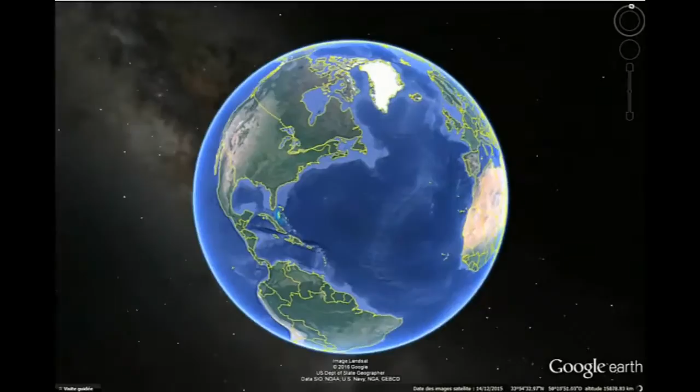Before introducing our retrofit, let me show you where it is based. We are in Paris, with the famous Eiffel Tower. Now we'll go to the 13th district of Paris. The Paris office is near the Tolbiac Bridge, not a big bridge, but well known by people who live in Paris. This is the Paris office here, and on this side you've got the François Mitterrand Library, also well known.

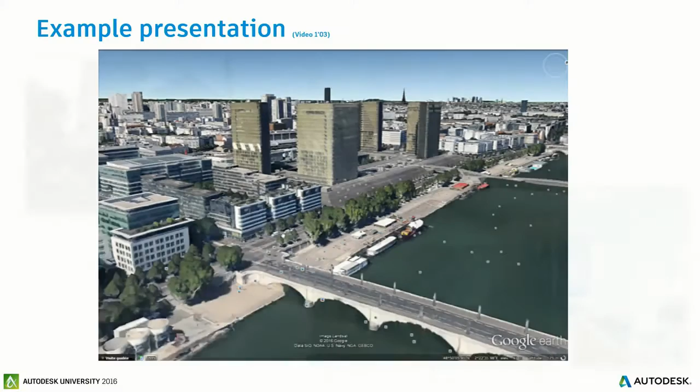Here you've got some pictures outside and inside, and this part was the area where we did the retrofit.

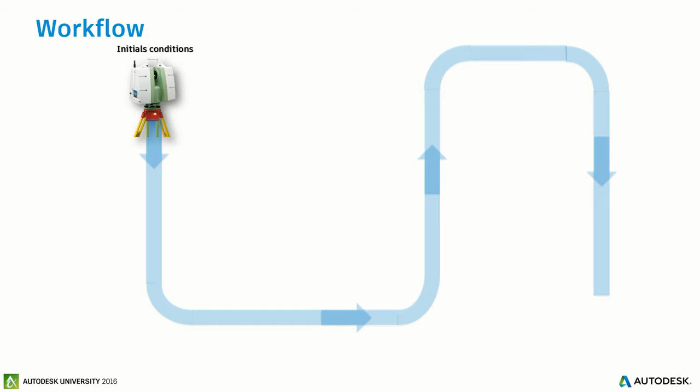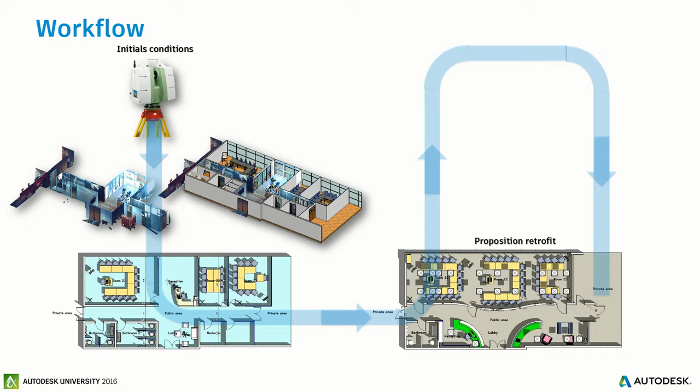Let me explain the workflow we used. First, the story starts with 3D scanning. As you see, we start with a Leica scanner, but it could be done with others, no problem. Second step, after capturing the point cloud, we build the mockup using a software. After building this mockup, we need to create some architectural proposition, using another software I'll show you after, and we obtain this final proposition.

After this, we need to build this on site. We use a robotic total station from Leica, I don't remember the name... it's the P40, or P50. And we build the retrofit.

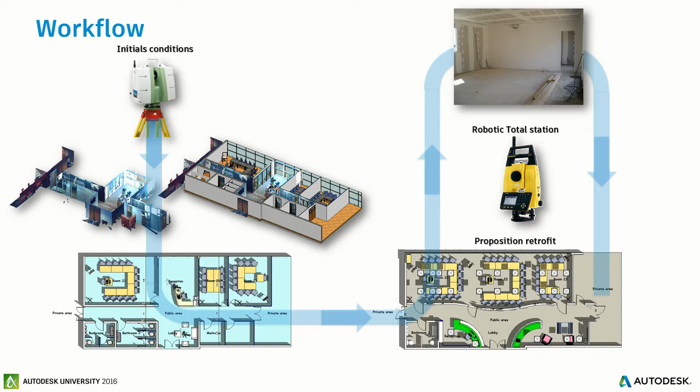We add another thing to our demonstration: how the accuracy we have on the site is taken into the final mockup. This is for quality reasons, to check if what was built corresponds to our mockup, because sometimes there's a gap between them.

And of course we use some software. First step, ReCap 360, which we'll talk about after. For the architectural proposition, we use Revit and Formit 360. Does anybody know Formit 360? Yeah, okay. And for the construction side, we use BIM 360 software services, like BIM 360 Layout and BIM 360 Glue.

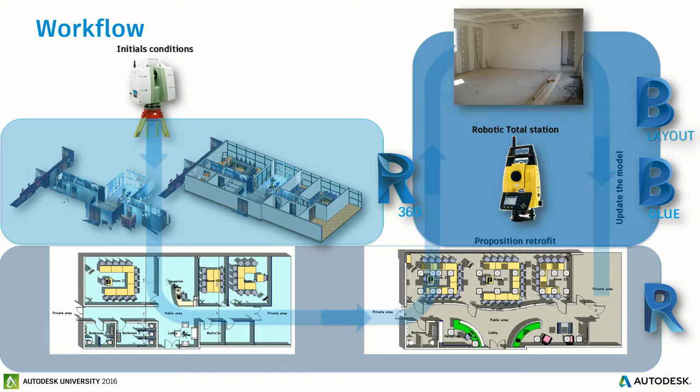First step, transform the point cloud taken on site into one single point cloud. Starting with the Leica 3D scan, we use ReCap 360 to merge all the scans into one single scan.

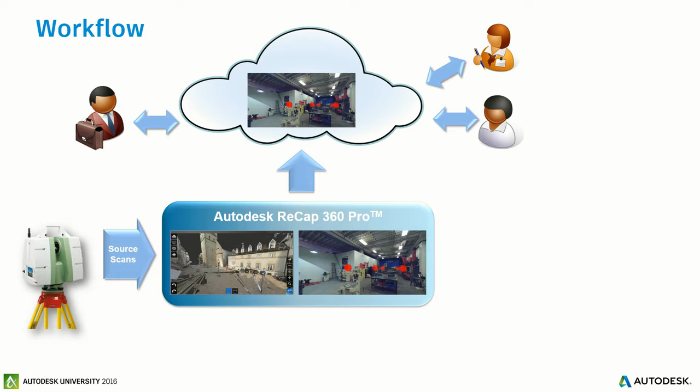The aim of ReCap 360 is to generate an RCP or RCS file to be opened in Autodesk CAD software. For instance, Revit, AutoCAD, 3ds Max, Inventor, Navisworks, and others.

Maybe some people have never used a 3D scan before. Let me show you this video. It is where the retrofit was made.

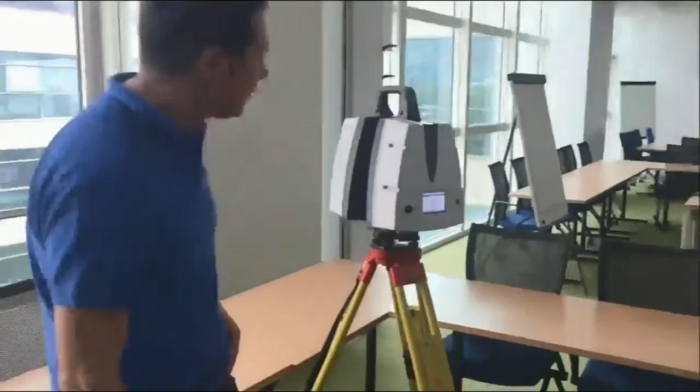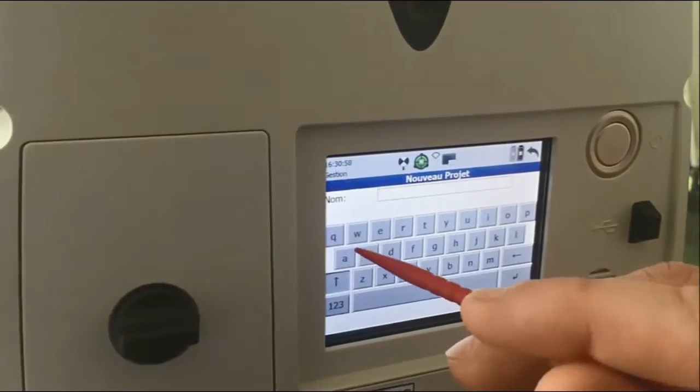You've got this scanner, a P40 Leica scanner. First you set up the scan, entering the project name and other settings such as resolution, whether you want color or not, and whether you want only one part of the area or the full 360 degree area. After setting these parameters, you click the scan button.

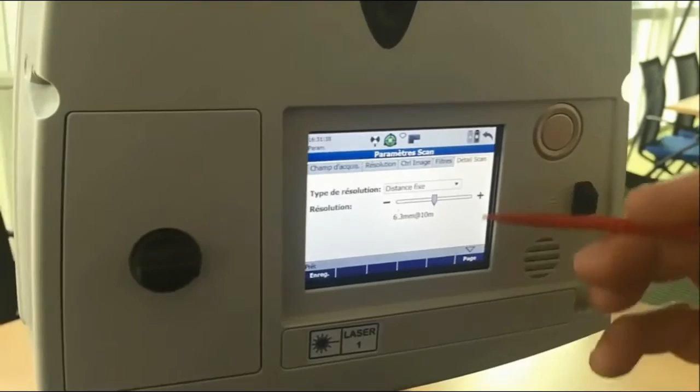Are you aware of Leica's announcement about the newest scanner, the BLK360? It will be amazing.

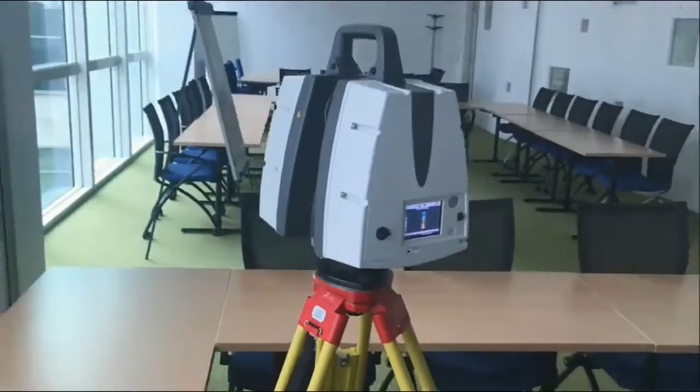When you start the scan, there are two steps. First, you use a laser to capture all points in space, giving you X, Y, Z coordinates. Second, it takes pictures, in color or black and white, to colorize your point cloud.

At the end, about 12 minutes after starting, you've got a nice picture with color indicating the intensity of each point. The better intensity you have, the better accuracy you will have. And it will look like this picture.

Now is the stage to bring this point cloud into ReCap 360. There are three steps. First, you collect all data into ReCap 360. This depends on the number of scans and whether you want color, and it takes some time, maybe an hour or more.

After collecting the scans, the second step is to merge all scans into one single scan. There is automatic recognition, meaning it takes the first scan with the second scan, detects the relevant common points, merges them, and creates groups.

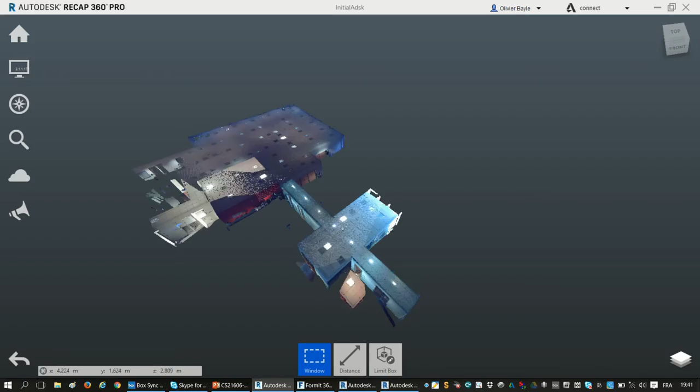Let's have a look. Oh, my computer is too quick. Sorry.

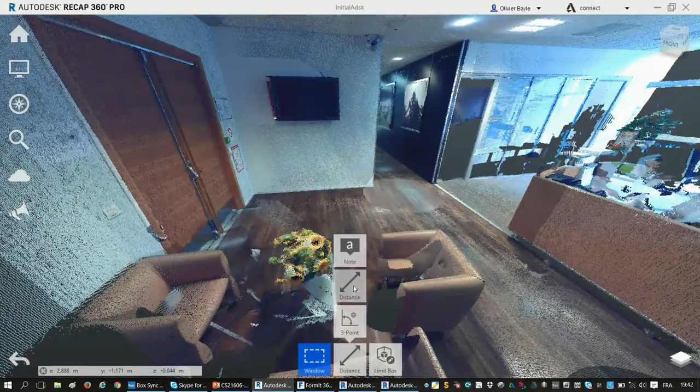As you see, you've got the same picture as I showed you before, but it is a point cloud. The point cloud allows me to take some distances. For instance, I'll take a measurement here, and using the tab mode, I can detect the vertical direction and get the right dimension in that direction.

I can also take some angles. You see, it's very accurate because this data is taken directly from the point cloud.

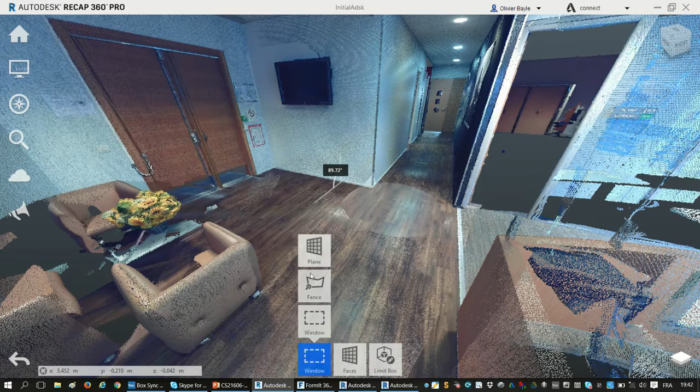You can create regions to switch some parts on or remove parts that you don't want. For instance, I'll create a region by plane, selecting some points, and it creates a region for me. I can give it a name, let's say Toto, and record it. You've got your Toto. You know Toto? It's a French name.

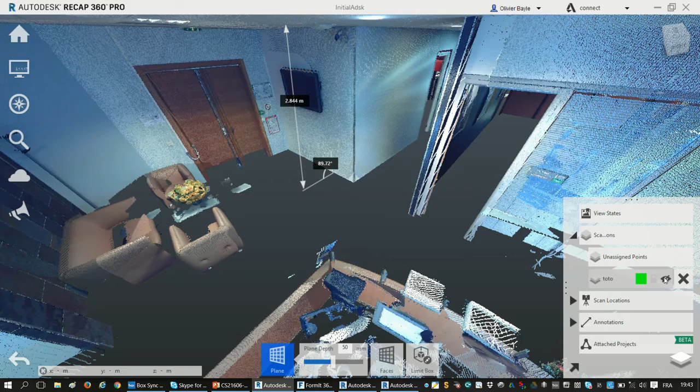You can fix or lock your point cloud, meaning you can't select or modify it, but you can also switch the point cloud off to avoid seeing it or making mistakes, to avoid trouble. By the way, when your region is fixed, you can create selections like this.

As you see, I select only this point cloud. That means if I create a new region, let's give a name, you can, if you want, remove it. I've got a hole behind the chair because there is no point under the chair. But you can clean your point cloud this way.

Of course, I can go deeper in ReCap 360 Pro because there are a lot of options inside, a lot of features. But I can give you some information about cleaning because we've got automatic cleaning. It is an automatic process that detects which points are noises, and it creates a special group that you can remove or hide.

There is another terrific feature I hope you will use after our presentation: scan to mesh. It is to create, starting from your point cloud, a mesh. It is awesome.

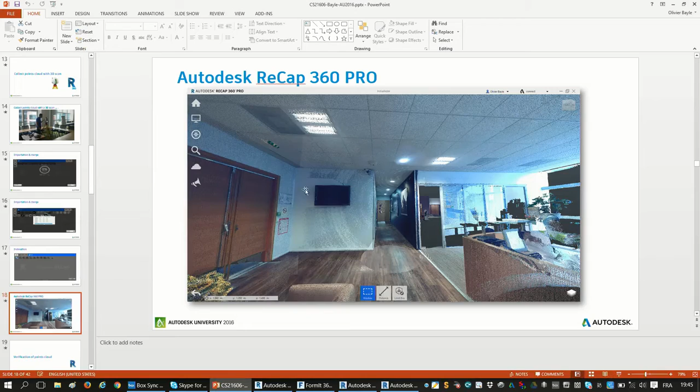Let's return to the PowerPoint presentation. Second step, it is to bring the point cloud into the software. The software to build the mockup, we use Revit. But we can also use Inventor or 3ds Max, though for this kind of stuff it's better to use Revit. I will show you the way to bring the point cloud into Revit, and show you the best way to create a wall or whatever.

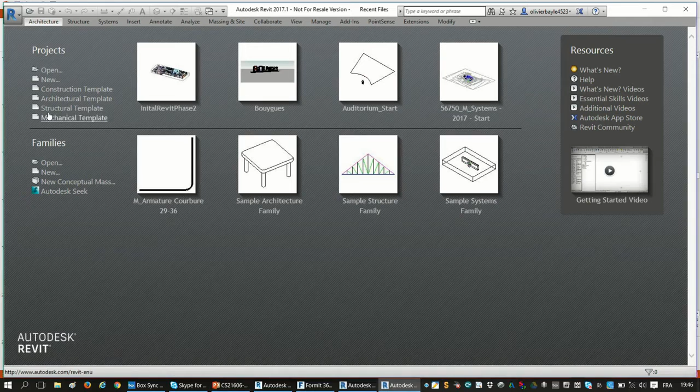We will see. I will start with the structural template. It's my template, but you can create your own. I am in 2D plan, but I can create a 3D view. We will see that further.

I will insert the point cloud. You've got a dedicated button in this area, and I will select the famous RCP file. Okay, it is inserted, and I will show you in 3D view my point cloud.

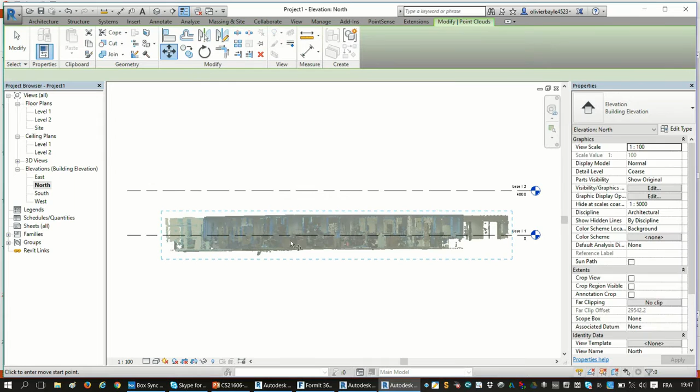Second step into Revit, it is to put the point cloud on the right position. I mean, I will take an elevation or cut, select the point cloud, take the tool displacement, take one point, and put this point on the right level. Not so complicated.

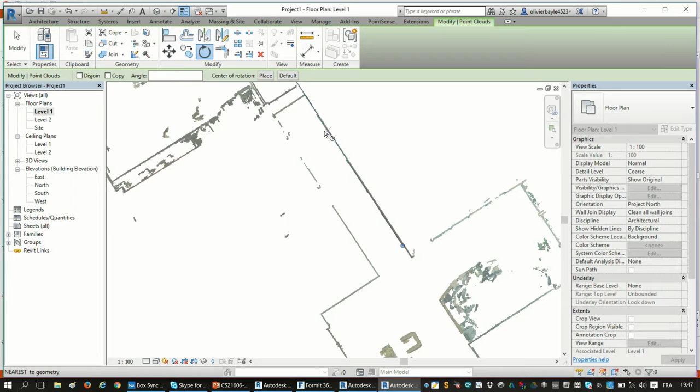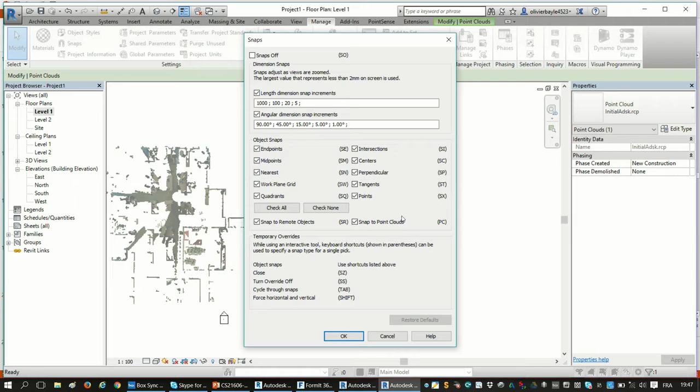I will go on level 1 and make this modification. I will turn the point cloud. As you see, there are some snaps about point cloud. For guys who never saw where the snapping options were, you can find them in the Manage tab, Snapping options, where you've got a point cloud option. Be careful, switch on this option because it's not so easy to do what I've done without it.

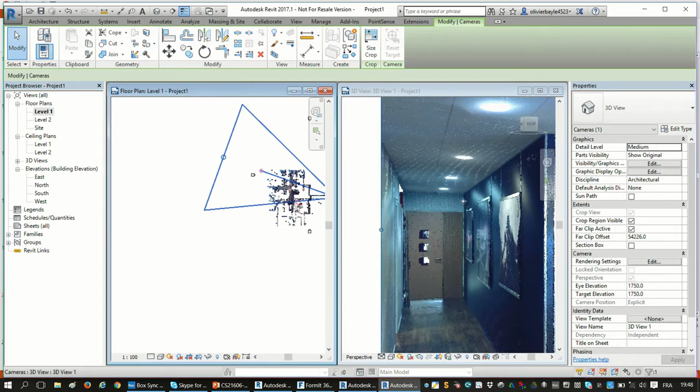And after that, I advise you to pin your point cloud. After that, you can use some Revit tools. For instance, I will put one camera here, and I will have the result as if it were a mockup. I will show you some other features using my 2D plan with my perspective view with my camera.

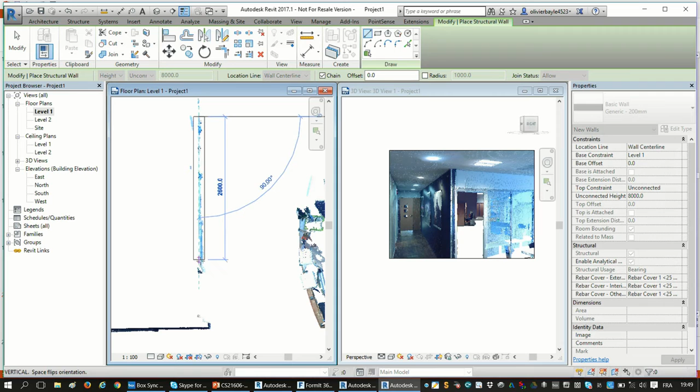Let me show you. It's not a big deal, it's very easy to create your mockup, basing it on the point cloud. But when you work hard, when you are well-known at Revit, you can have this kind of result.

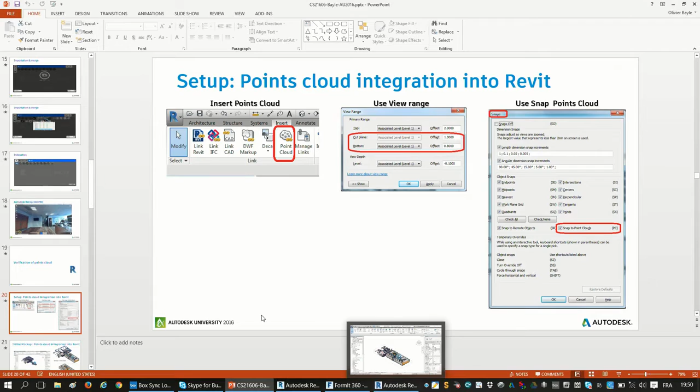I will show you the final result. I'll give you some metrics at the end of my presentation to tell you if it took me 1 year to create this or 10 minutes. It's not that, but you will see. That is the final modelization. As you see, I put some walls, tables, chairs, and the desk here, based on the point cloud.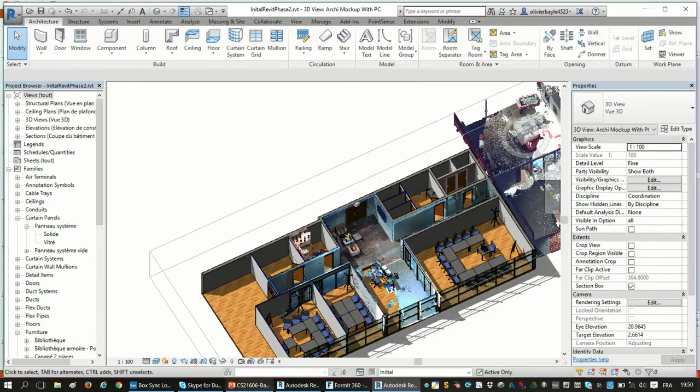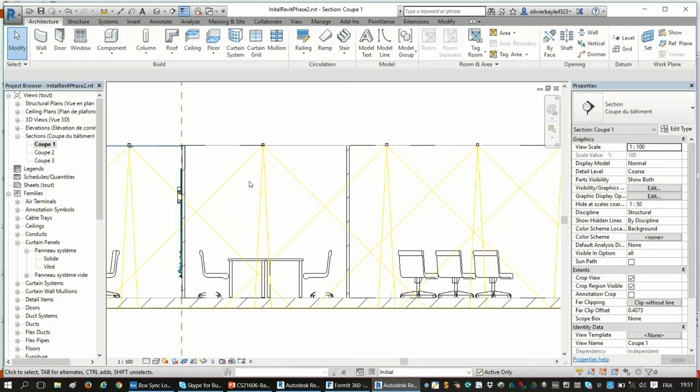Now the second step, I can show you the model in depth. I will switch on the point cloud. It is an option you can find in visibility graphics of Revit, and you can show cutting. I've got some cutting, and as you see, I put some light because at the end I can create a 3D view with a nice presentation, let's say nice rendering. The more objects you put in your scene, the more pleasant it will be. But we will see later what can be done with this.

Next step, we return to the PowerPoint. It is an architectural proposition. In front of you, you've got two engineers, one structural and one MEP, and we try to make another job, an architectural job. Not so easy, but it's done.

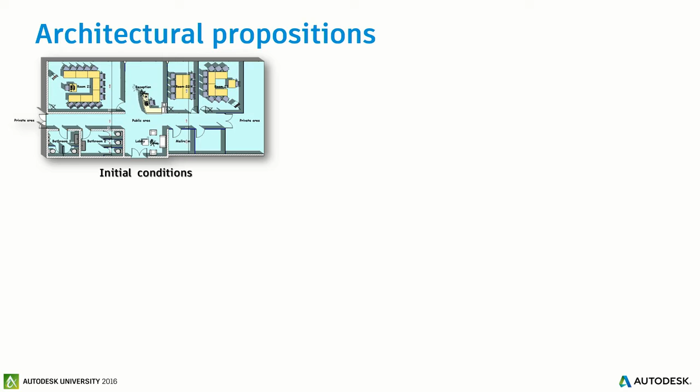Okay, starting with this initial condition, we use our brain, as I said, to use another software called Formit 360. There are two versions, one based on the cloud, and there's Formit 360 for Windows. I use Formit 360 for Windows.

And we create a bunch of propositions. For instance, here's one proposition, more advanced, with material, to finally have this final proposition. And I don't know if you're aware, you can send your proposition directly into Revit. That's part of the workflow so you don't have a disruption between the conception and Revit stuff.

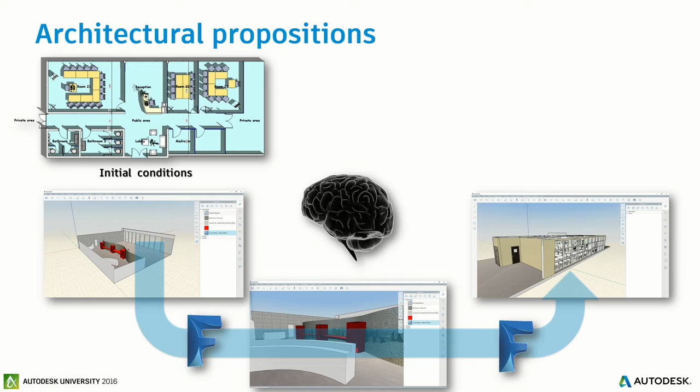And for those who have never seen Formit, here you've got Formit, and it's very easy to use.

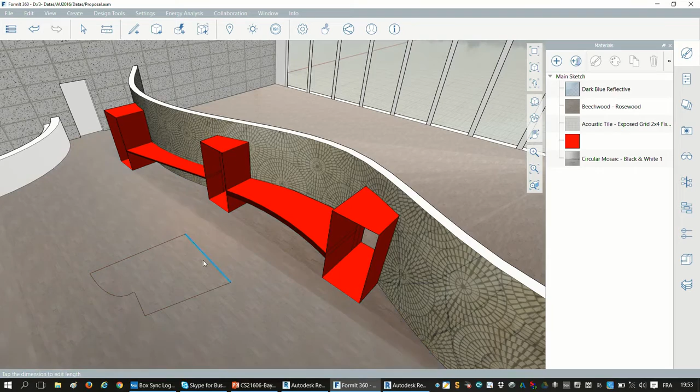For instance, I will create one shape. We will use the arc tool. And it's not closed because I should have... it's not closed, why? Let's put it outside. Sorry, it is in meters, not imperial. Yes, I got it.

And I can push-pull. I can do some... I can add some fillets. Oh sorry, it's important to create the fillets.

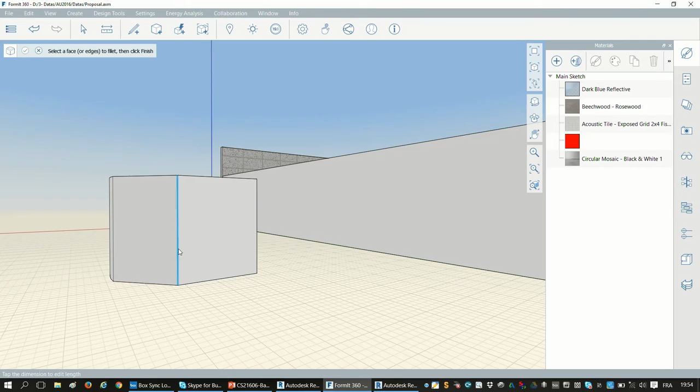Okay, at the end you can create this kind of stuff. And as I said before, sending to Revit, you've got this shape, and you can continue to finish your work into Revit.

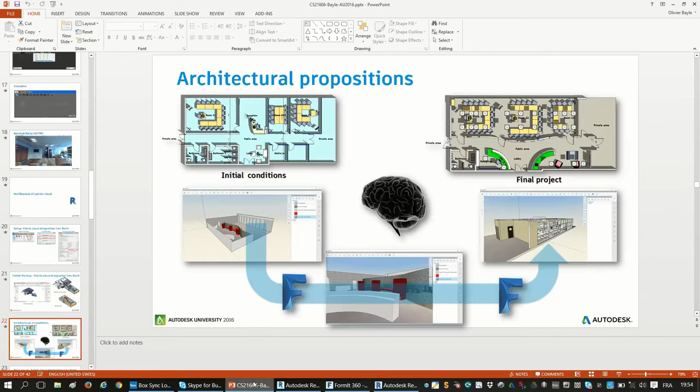Okay, and the final proposition was this. As you see, the same file, but we use an option in Revit. I don't know if you're aware, there is a design option. You can have several options in Revit, and it's easy to handle a lot of propositions in Revit. For instance, I will show you what it looks like in Revit.

Using this option is very simple, because you start from the initial condition, which was your external wall. Using this option, I've got the box where I retrofit the office. Let's continue, and I think the most attractive part is for you.

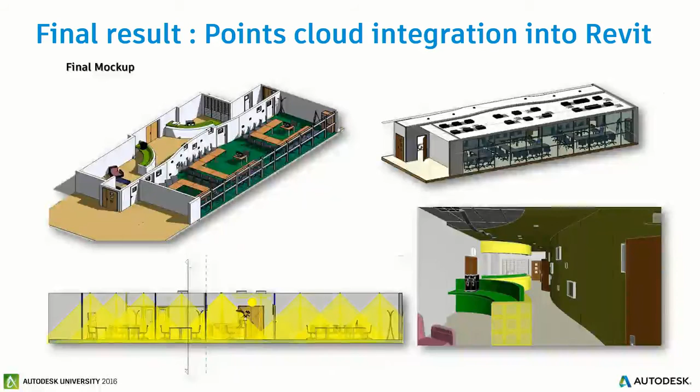So let's consider now you have your design option, you have chosen what will be done on the construction site, and you want to take advantage of this model to put the information on the construction site. So the first step is to add points in your model so you'll be able to get these points and use them on the construction site through robotic stations, such as the Leica one provided here.

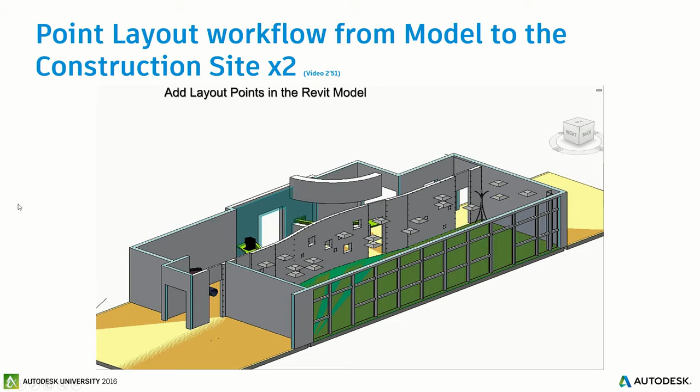So the workflow involves Revit, Autodesk Point Layout, BIM 360 Glue, and BIM 360 Layout. Here in Revit, we will use the Autodesk Point Layout application.

So the add-on that is provided with Autodesk Point Layout lets us add points automatically, either directly on walls or on a window or any kind of element, or you can also use it for faces, so you put points on faces every, for instance, 3 inches or so. And that's what we did for this project.

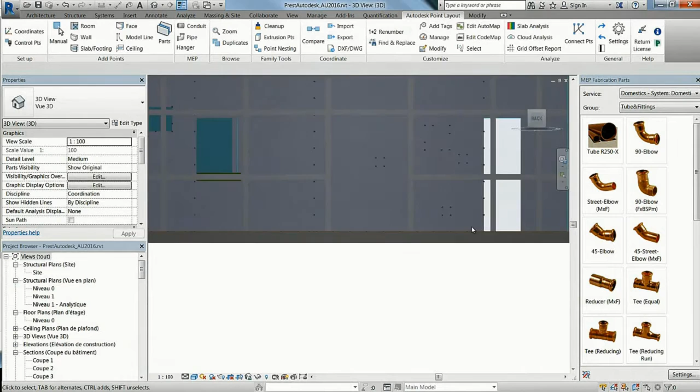We had automatically points on each face of this curved wall, because we focused on this curved wall, which is the most difficult to lay out on our project. Once you have all these points, we just filter the ones on the bottom to use on the construction site. So we filter it, select it, and just change the description.

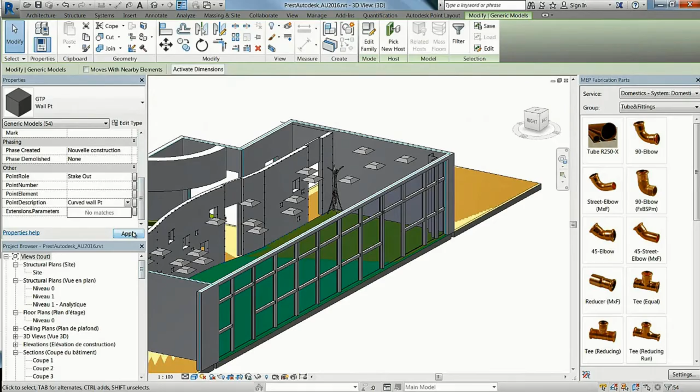And you've got 54 points. And this curved wall information will be easier to find on the construction site.

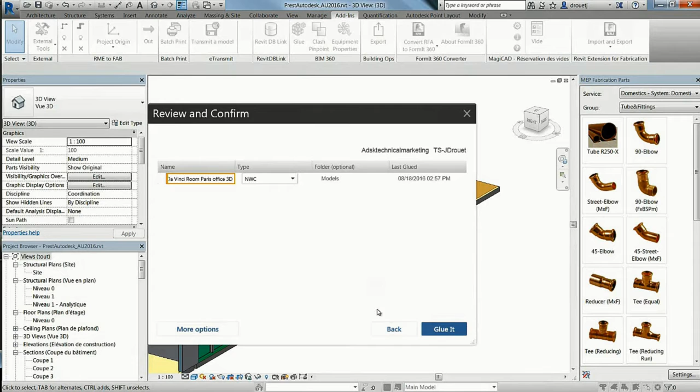So the second step is to push your model with the points onto the cloud. For that, we use BIM 360 Glue, so we glue our model where we have all these layout points into BIM 360 Glue. You can glue any kind of view, and in that case we'll just upload the 3D view and the name of the room concerned. This is a Da Vinci meeting room in Paris.

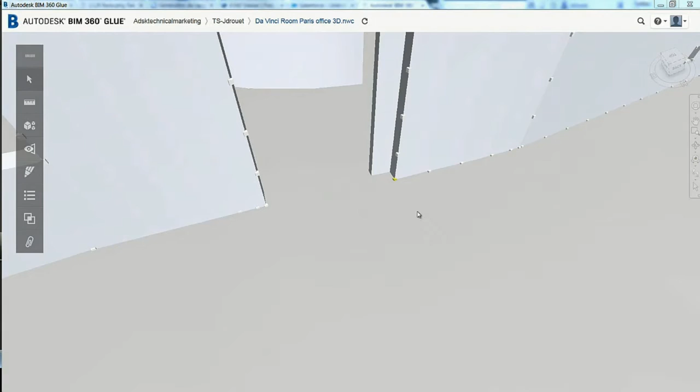And now in BIM 360 Glue, you can just check that you have your model and the points, and you can access the information on the points, which are considered as an element of the model. The final step, of course, is to check that in your BIM 360 Layout application on the iPad.

You have also this information, which is logical because it's using the BIM 360 Glue model.

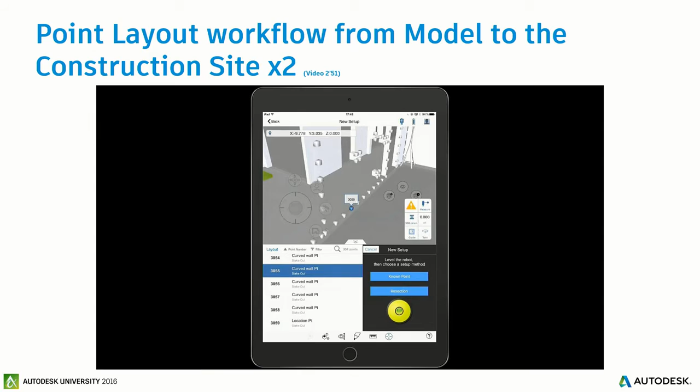And in our case, so we open the model, and you see all of our curved wall points that are available in the application. Now, let's move to the construction site.

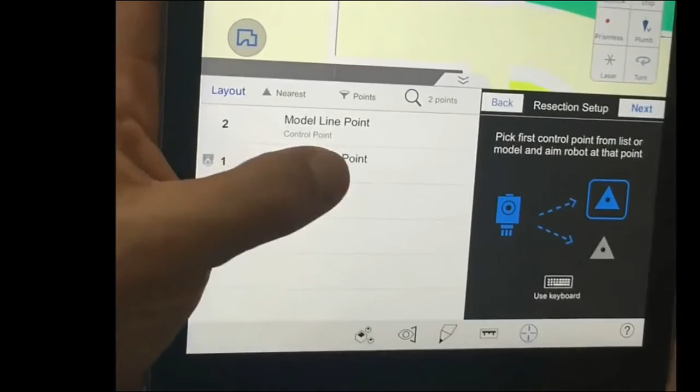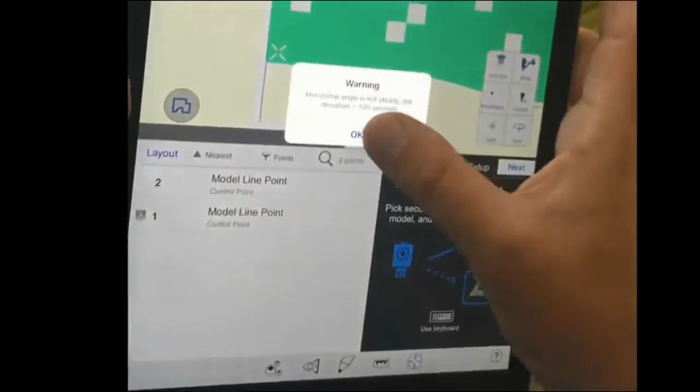The first thing to do, of course, is to localize, to position the robotic station in the model. Because if we want the robotic station to show where the points are, it must be geolocalized in the model. For that, you need to use some reference points. You should have a point on the construction site that you have identified as something sure, and that also exists in your model. You need at least 2 points like that. With these 2 points, you will be able to know exactly where your robot is in the model.

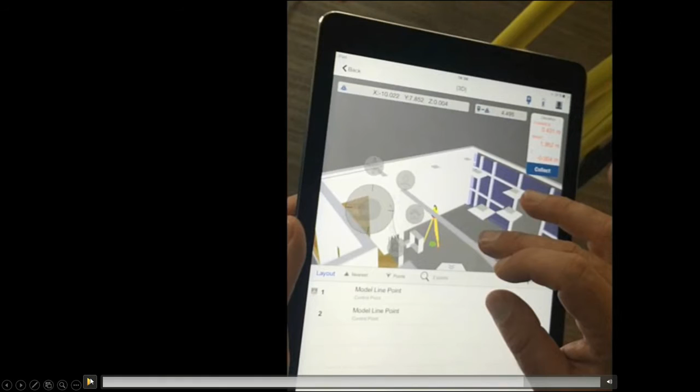So there is a process on the iPad to do so. As I explained, we didn't have the video for this work done during the construction site, but we reproduced the workflow this summer when the office was empty, just to show you how to proceed for this layout workflow.

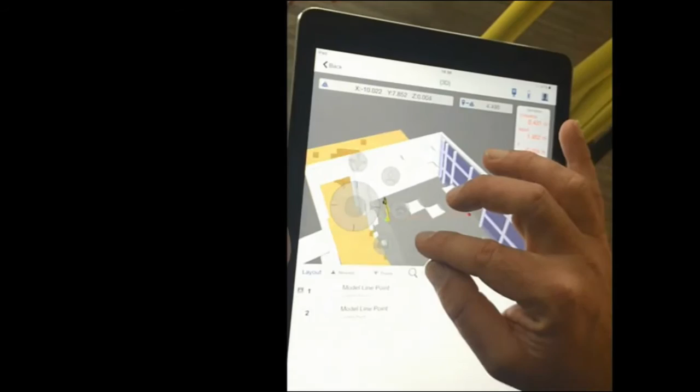So once the robot station is positioned in your model, you will be able to lay out, to stake out all the points on the construction site. That's the goal of this second video.

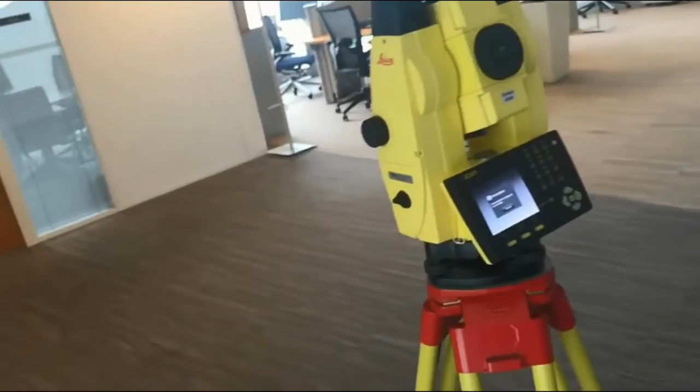You have 2 ways to lay out points. The first one is to use a prism, so the robot will send the information to a prism, and the prism will be positioned exactly where the point is. The second solution is to use prismless. It's less accurate because depending on the angle between the laser and the ground, the position of the laser can be off and it's maybe not so accurate, but it's easier.

So what you just have to do is select the point on the application and then ask the robot to show you where the point is on the construction site. And the laser will directly show you, oh, it's here. Then I mark it up, and then next point, next point, next point, and so on. And there's some beep, beep, beep. It's sometimes a little bit boring because all the time beep, beep, beep.

And the last part of this global workflow happens when the project is actually done, and you want to check and verify if what has been built on the construction site is correct and corresponds to your model. So in that case, the full workflow will involve different material and solutions.

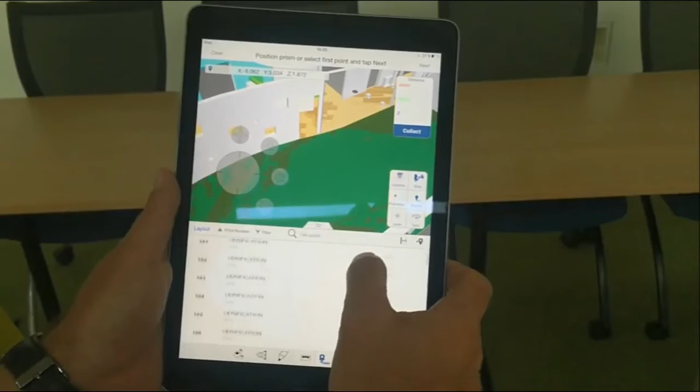So here we are back in the Da Vinci room, the real room, and the project is done. We want to check if the little window you can see on the curved wall is correctly positioned in my model now that it has been done. So I just select a point in the angle, and I see it's not exactly the case. So I will manually move the position of the laser to the right position, the existing position of the window.

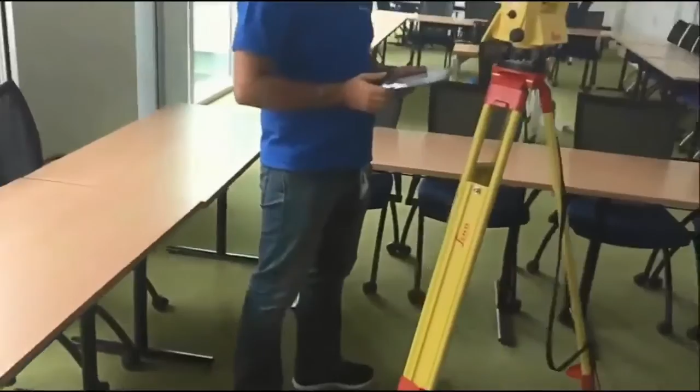And I will collect through the BIM 360 layout app. I will just click on collect, and it will get the new position, the real position of the angle of my window. So I can check for different elements. In our case, we just do it once. The goal was just to show you the principle. And so you give it a new number for your collected point, so that you will be able to find it easily later. You can add a description.

Once you get all this information, you reconnect your iPad to the internet. At that moment, all the collected points you added in your model will be uploaded to BIM 360 Glue.

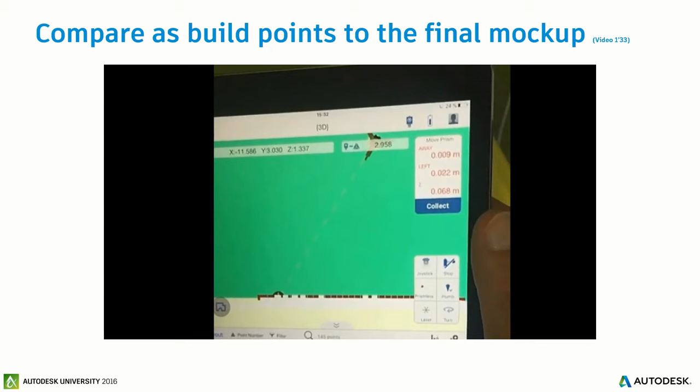Because of this process, you are not obliged to be online. It's working offline. Most of our BIM 360 solutions' main advantage is that you can work offline using the cache of the mobile device, and only when you are connected is everything synchronized. So that's exactly what happened in this case. We will just re-upload all the information to BIM 360 Glue.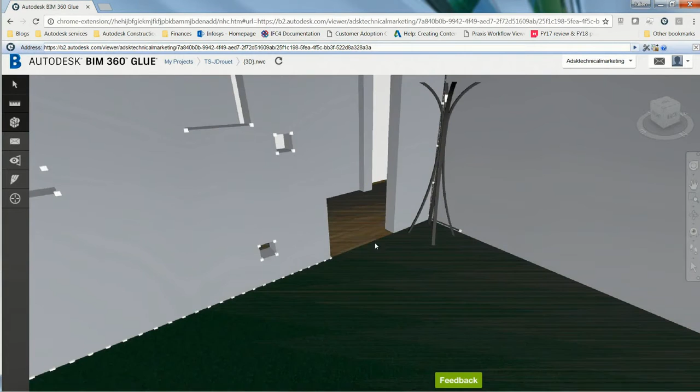Back in BIM 360 Glue, you notice it's in the web browser. If you want to get this information, you need to launch the web browser interface, not the application. You have some filter tools, so you enter the number of the points you collected, and you can see I have an as-built point. Then back in Revit, you do the reverse process as we did previously to implement the points.

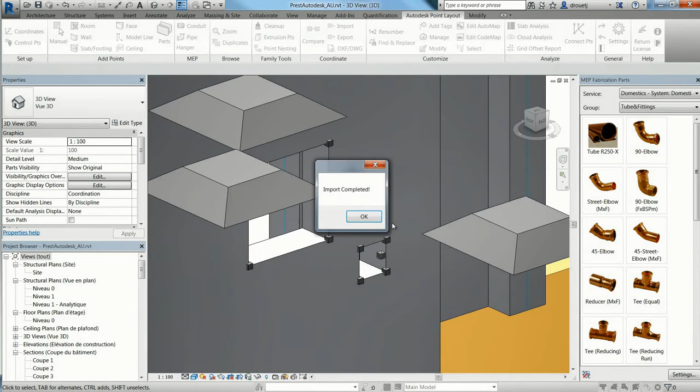I will re-import in Revit from BIM 360 Glue the new point I collected on the construction site. So now the point is here, as you can see.

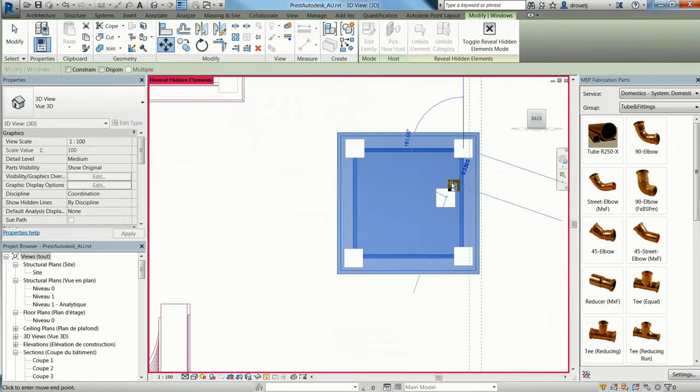Now I have two solutions: either I destroy the wall and redo exactly the window where it should have been, or I can just update the model and move this window to its right position, the position it is exactly done on the construction site.

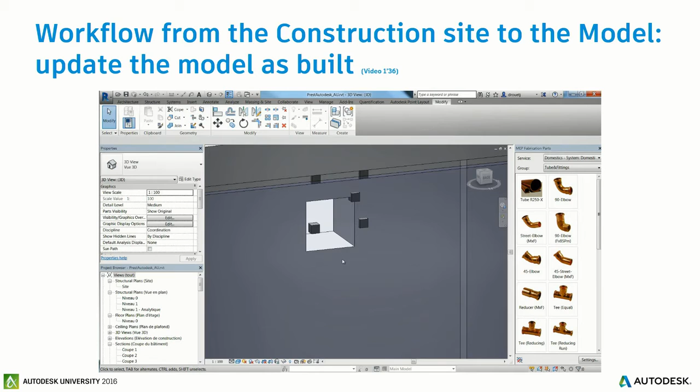So that's what we did. This way, you can deliver the accurate model to your customer, because it's always an issue - there is a reality and there is a mock-up, and sometimes there are some gaps between them.

It will be a question, I suppose. What is your metrics about what you've shown today?

Okay, it's not a big point cloud, only 7 scans. This scan was made in about 1 hour, because one scan takes me 10 or 12 minutes, taking into account that I need to change the position of my scanner. So it was about 1 hour total.

Concerning registration and indexation made into ReCap 360 Pro, it took me 2 hours and a half, because in this workflow, the biggest part is to import scans and index them. Of course it takes time, but in reality, when you've got more than 7 scans, you launch this indexation and registration during the night.

About the point cloud, only 45 billion points - I said only because most of the time I handle more than 45 billion. Millions? Millions.

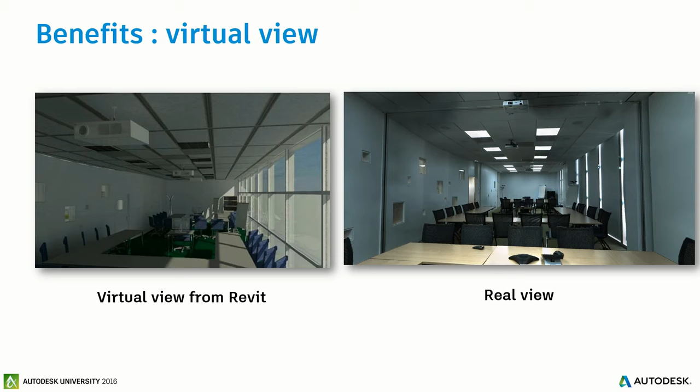Conclusion - we need to tell something before this, no? Actually, our main regret was that some of the technology we presented was not available at the time of construction, so we couldn't provide you pictures of using the scan on the real construction site.

But I think globally the goal of this presentation was to apply these construction workflows on a project and show you the different steps of what could have been done in the best world, if everything had been available at the time of construction.

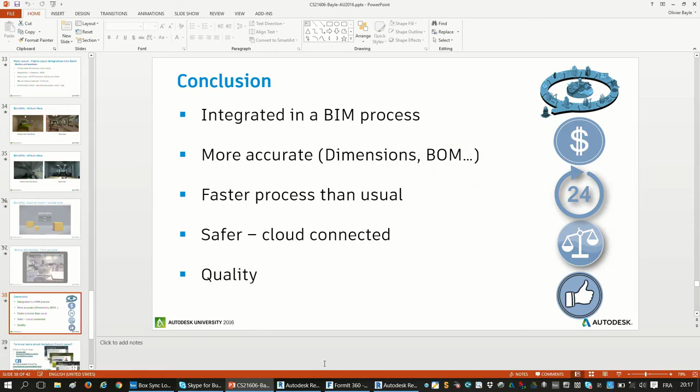Another point - maybe you will show shortly in ReCap the last scan, because just to notice, the first scan Olivier showed you at the beginning of the presentation was made with materials that are actually three or four years old. So it's not the latest material, but the technology evolved, and the quality of scanning today is much better, and you will be able to notice that through this presentation.

As you see here, I've got... it's too quick. Wait. It's still loading. It's okay, not far. Okay.

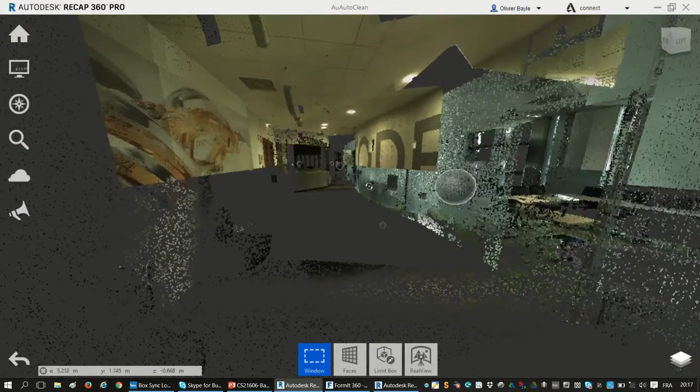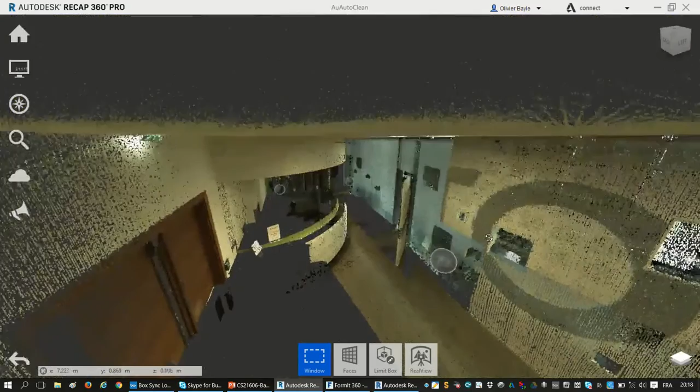If you come to visit us in our Paris office, you will get that in reality, not virtuality. But we can meet together in virtuality if you want.

And you've got this bubble. I call this in French a panorama view, but I don't know, they call this a RealView into ReCap 360 Pro.

Another tip that I can give you for Revit - when I use Revit, I use point cloud inside, but I use this panorama view to create the mockup, because sometimes you've got more detail in the pictures than you can have in the point cloud.

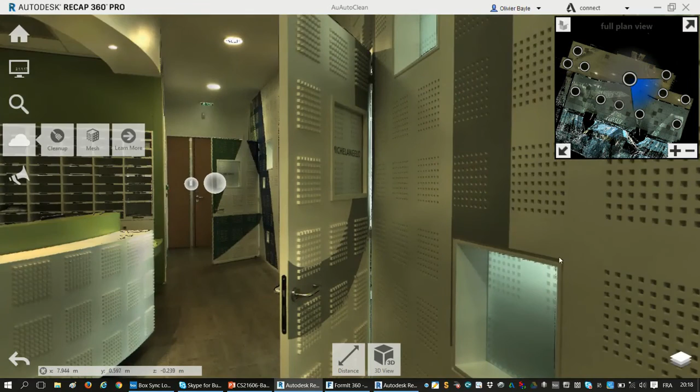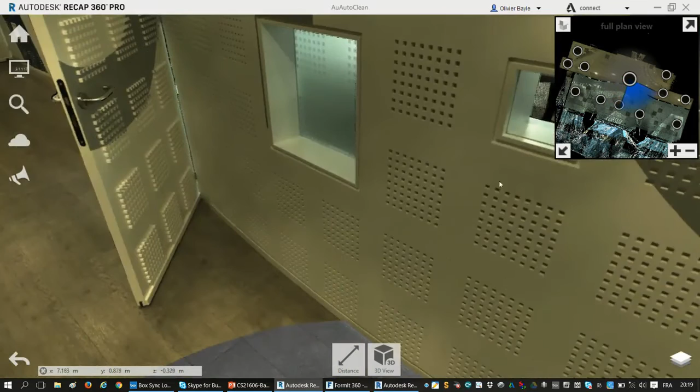I made a request to have this kind of view into Revit, and to put this view on different screens - you've got two screens, one screen with this, one screen with Revit. And I will show you the final mockup into Revit here.

As you see, I create some cubes that you have into the point cloud and in reality. Not so complicated, but I based this creation on the point cloud. Now you can create a very detailed mockup.

At the end, our conclusion - first, we tried to show you the best way of using our software. Material from Leica, as I said, could be used, but also other materials - Faro, Riegl - because ReCap 360 Pro can embed a lot of point cloud file formats.

And of course, we want to show you the best practices to bring your point cloud into the construction site and return it into Revit for question of quality. It's important to deliver to the customer the right mockup.

Basing our mockup on top of the point cloud, we get a very accurate mockup. That means there is no difference between what is scanned and your mockup. And of course, if your mockup is very accurate, you will have a bill of material that is very accurate also.

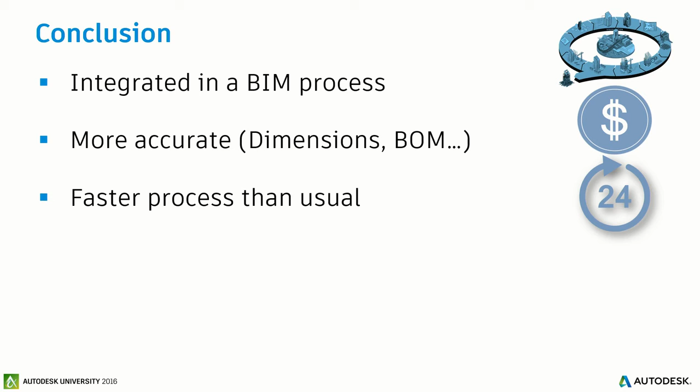So you work faster. The information is safer because through this BIM 360 process, the information is stored on the cloud, and you are sure it is up to date. I think you've heard a lot this week about our goal of having a single environment of truth for all the data. So that's also important.

Finally, you get something with better quality, and everyone is happier with that, especially the customer, to get an as-built model that is realized with high quality.